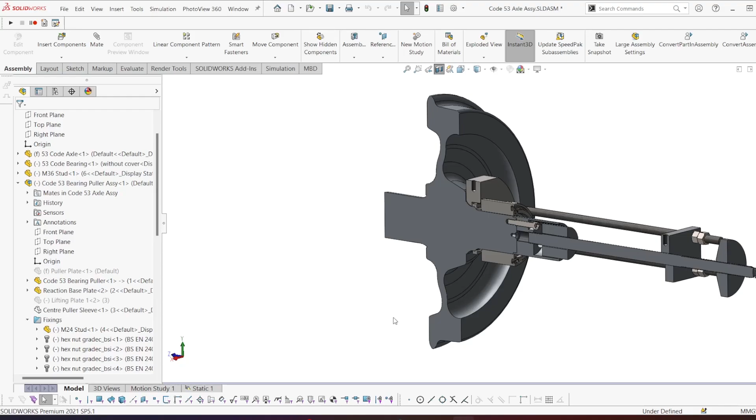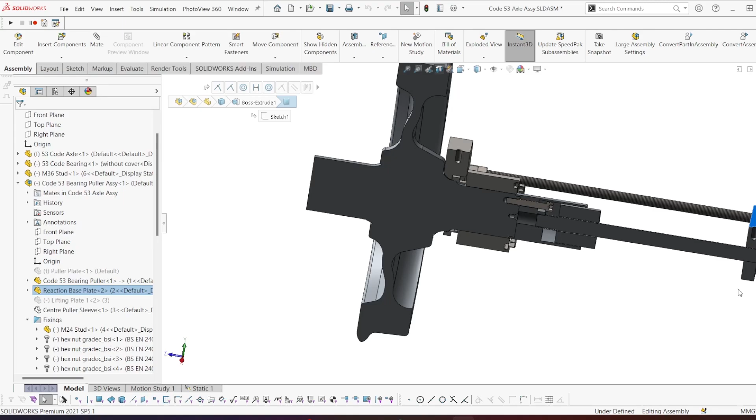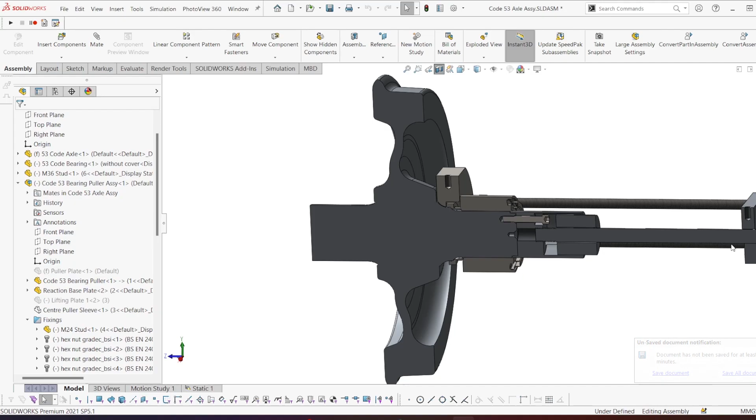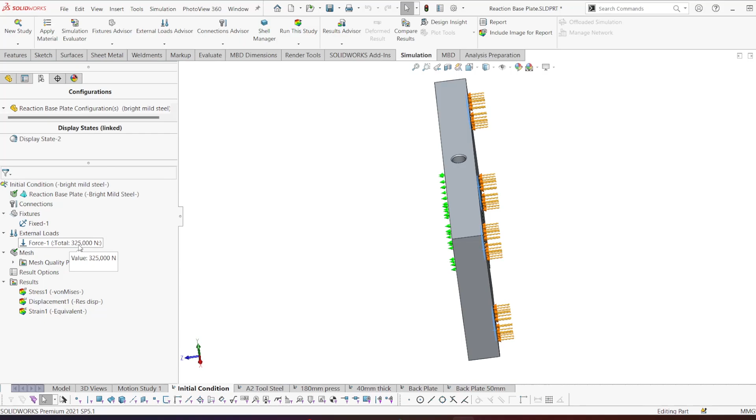Going into the part here, this is the standard part, and in the initial condition, we know it failed by 1.2 mil on either side. How much force would it be required to emulate that? That equates to a total of basically 32 tons, or probably closer to 34 tons here.

And if we look here, you can see that this creates a deformation or a max displacement of 1.2 mil on this corner. That means if this was sitting on the bench here, exaggerated by a factor of 25, this lip here would have extended by 1.2 mil from the table.

So in actuality it could be half that, but we'll work with this as a safety margin, because naturally the forces and the friction could be different, so it could get worse over time.

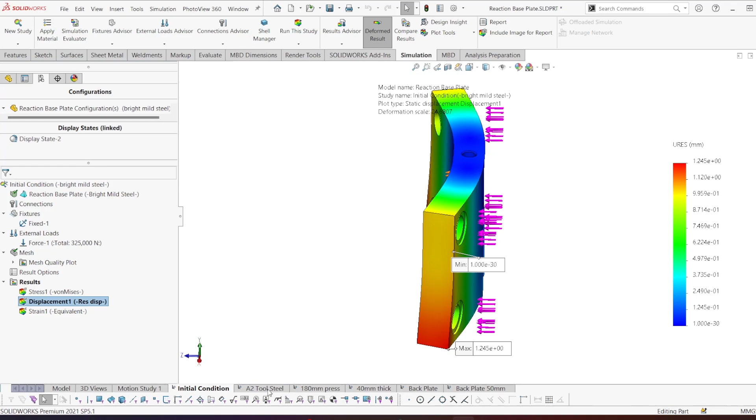So then the logical conclusion is, this is 32 mil thick, what happens if we go for A2 tool steel, which is what this is? One thing to note with the previous configuration, as bright mild steel at 32 mil, this is experiencing about 1.4 gigapascals of stress, mainly localized in this area.

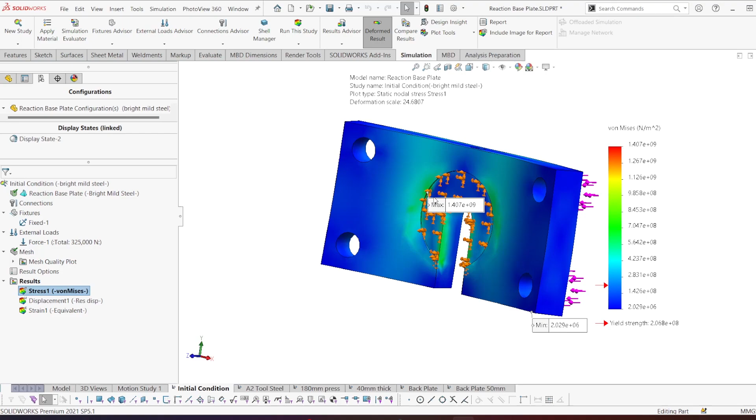That's mainly where the stress is, and naturally where the hydraulic press is hitting, which I've assumed to be 100 mil in this small area. You can see a lot of the highest stress is actually on the lip of that hydraulic ram, and also at the back area here.

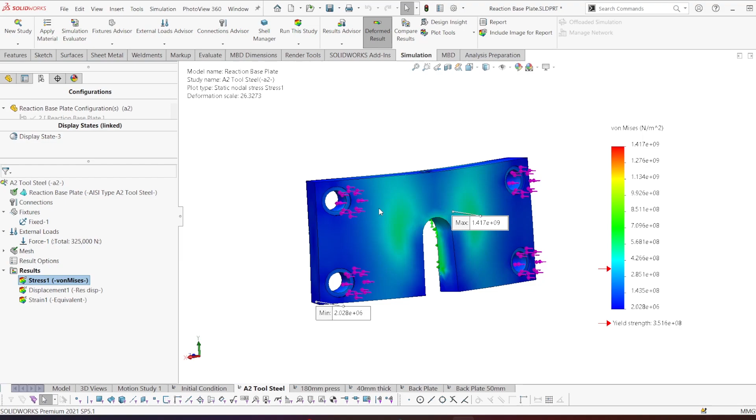Once we apply A2 tool steel, we can see that the stress increases marginally. Why is that? The reason the stress increases is because tool steel is a harder, more rigid material, i.e. it's less ductile than mild steel, which gives it strength but at the same time makes it more brittle, meaning that the harder the material, the more likely it will fracture completely instead of bend, as we've seen with the bright mild steel.

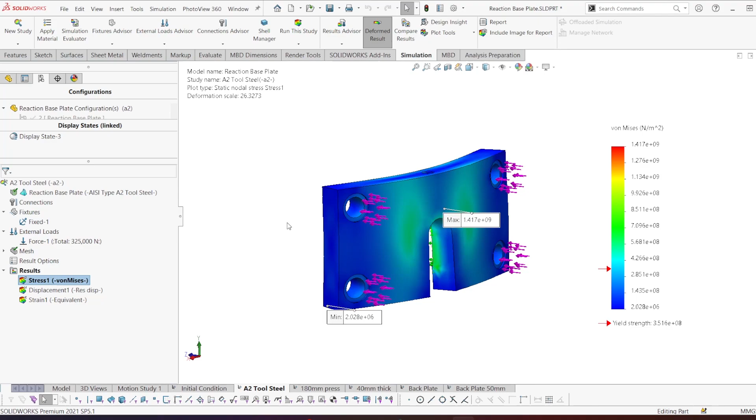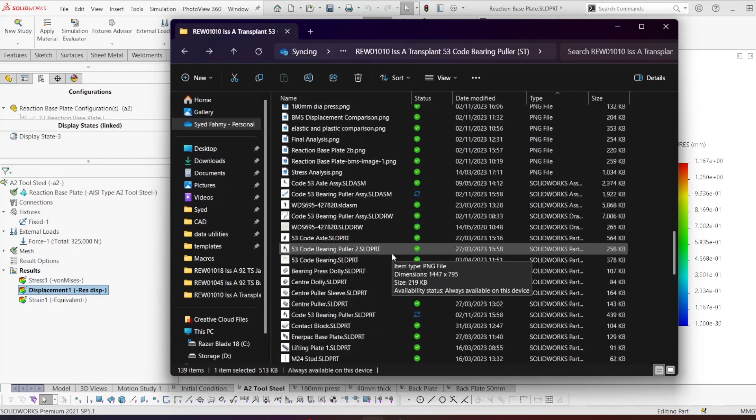The displacement is less, so we can see here that with tool steel, nothing changed other than the material. We're getting about 1.16 displacement, whereas it was 1.2 something before. So it's worth noting that the displacement is improved but not as much as we thought. We've seen that tool steel improves it, but not enough.

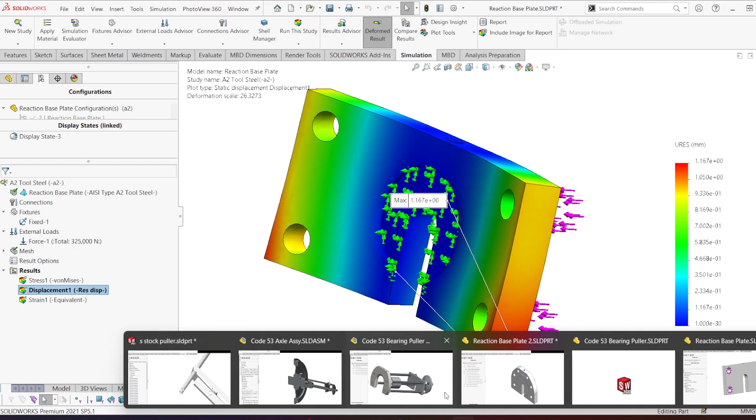Then the key point, what we haven't discovered before, is actually the distribution of the load from the hydraulic press itself. And I thought, what if we use, let's say, this back plate here between the hydraulic press as we're trying to extract the bearing. This has a diameter of 180 mil, but let's say we use a similar material, a spacer of sorts that's 180 mil. What would that do to our result?

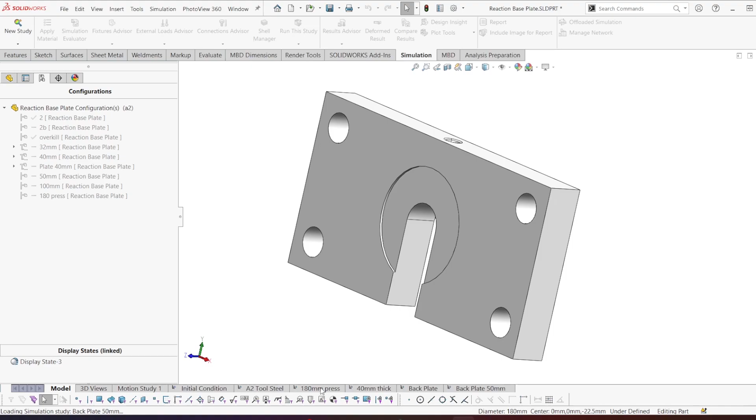So what that means is that the force distribution is greater. Where the hydraulic press was applying a force here and creating more stresses and a bigger moment, what happens if you have a bigger disc that reduces that sort of deflection? Would that help? And the answer is it does, which we'll see now.

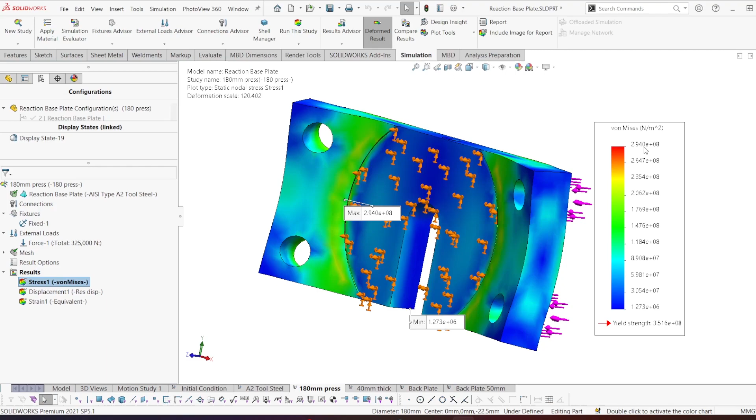So at 180 mil spacer between the hydraulic press and the back plate here, we can see immediately that the stress has already gone down to 294 megapascals, which is less than the yield strength of tool steel, which is about 350. So this is already a good result without changing material. Displacement is now at 0.25 mil, which is negligible, and because the stress does not exceed the yield strength, this would spring back into its original condition.

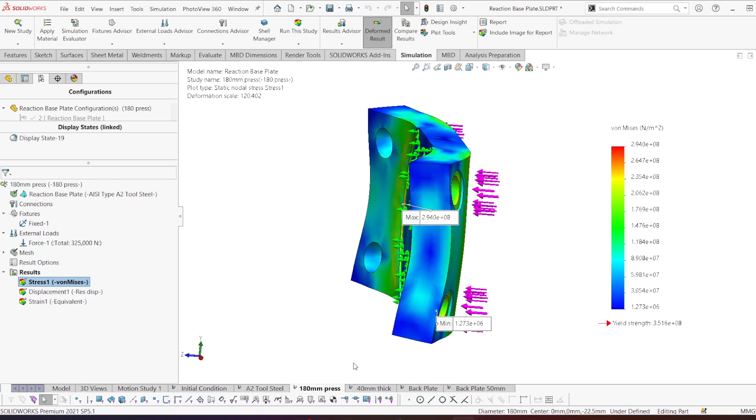Now, to be on the safe side, obviously the next question is what happens if we make it thicker. Hence I've got this little option here. So this is 40 mil thick with the same 180 mil diameter disc to distribute the stress. And what does that look like?

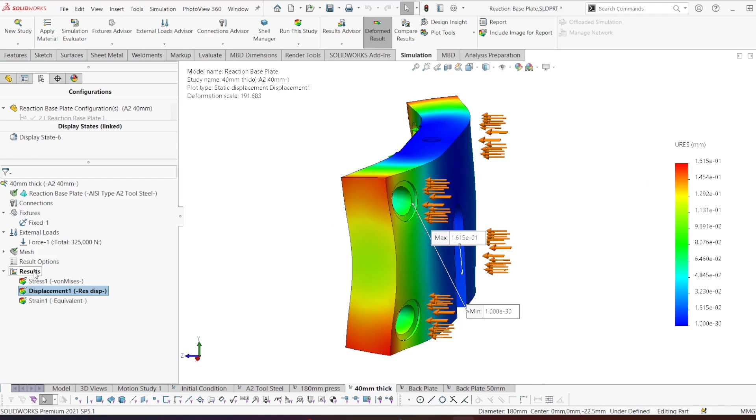So with 40 mil plate, the stress actually goes up marginally, but the displacement goes down again a little bit more. Before it was 0.25, but now it's 0.16. And I suppose I should explain about stresses a little bit more.

This is showing the maximum stresses along an area. Just because you add more material—some of the suggestion is, for example, what happens if we add material to the side here or to the top here, and I've tested those as well, but basically it doesn't help, because as you can see the green line here, this is where the stress is.

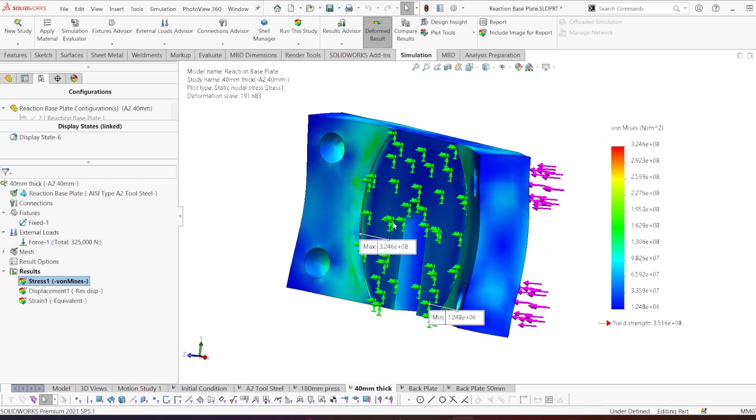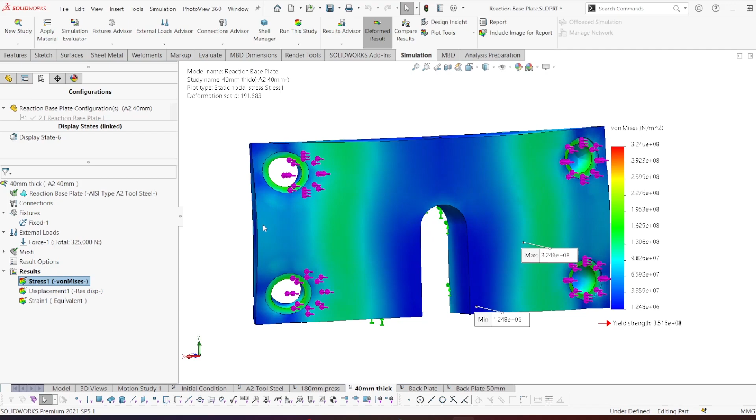When you're holding that bit fixed and you're applying a force in the position of the nuts here, then naturally this bit is experiencing the stress of those forces. Less so at the top here. So adding more material here doesn't reduce the stress it's experiencing here. Adding more material here, because you can see it's cold and blue there, doesn't reduce the stress here.

40 mil plate thickness improves things—between 32 mil and 40 mil, it's a big help. So this is the 180 mil on this side, the stress and displacement. This is 32 mil this side and 40 mil this side, and we can see that at 40 mil you actually increase the maximum stress in that specific point, purely because you've added material and there's, let's say, more to go around.

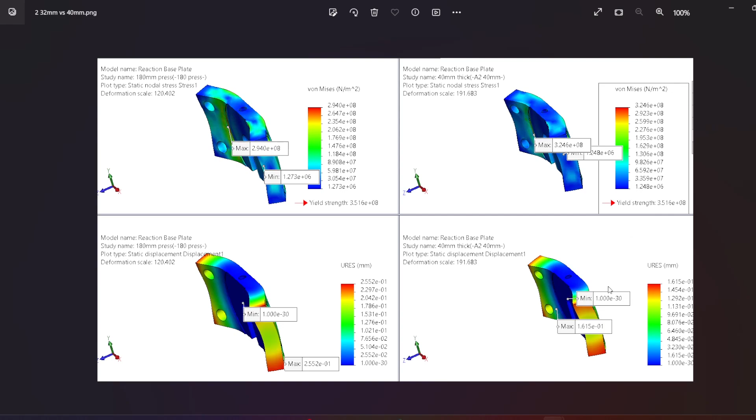I'm not sure how that translates, but ultimately you've reduced the displacement by another 0.08, 0.09 even, between these two. So 40 mil does help, about the same as the addition of converting this to tool steel. So we know that 40 mil helps.

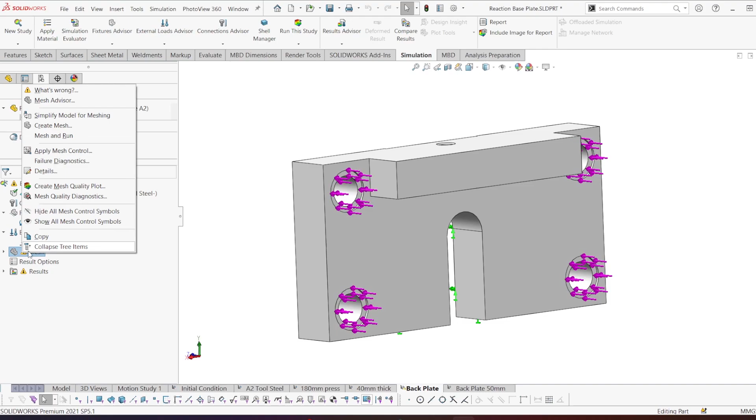What else could we do that would improve this? Naturally, it's the back plate, which we talked about as well. So now that you add a back plate here, the idea is that you distribute that sort of stressed area along this little bar, and let's see what that looks like. So the stress is reduced significantly.

I believe this back plate is, I want to say, 40 mil. Yeah, it's 40 mil thick with a back plate, and the displacement I think was down again a little bit more. This was 0.16 something, now it's 0.15 something. But again, it's good that the stress, or the maximum possible stress experienced, is less than the maximum yield of a tool steel.

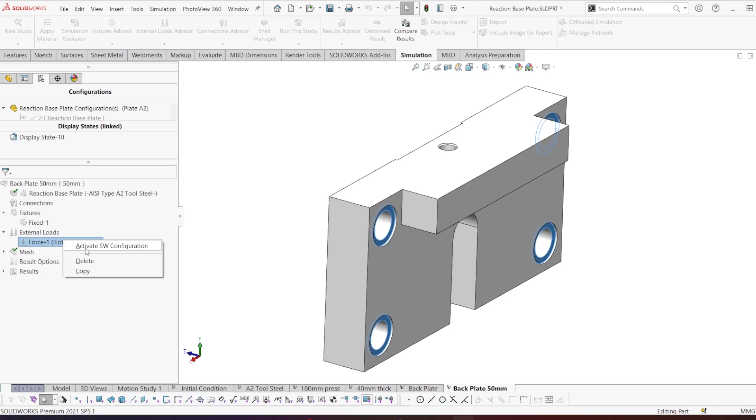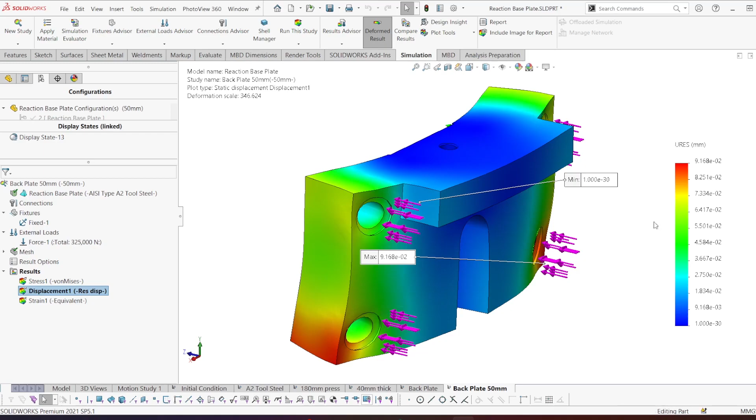And just to go the extra mile, this is the 50 mil variation. If we made it mega thick like so, you can see that the stress is now at the 200 megapascal region, and the deflection now goes to 0.09, so nearly 0.1 mil. So a big improvement still.

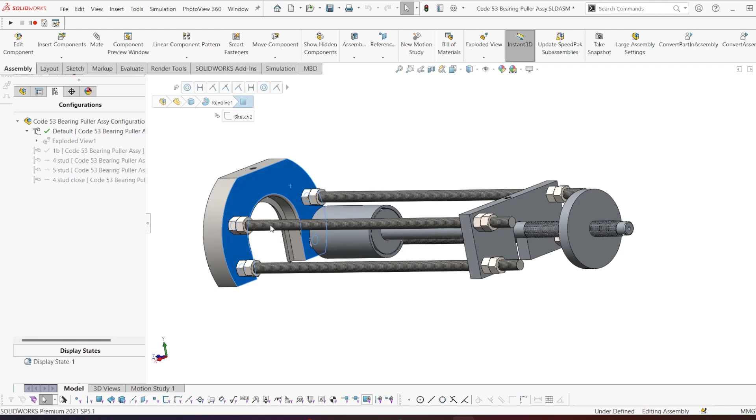And finally, I had to play about with like the maximum ultimate, probably overkill design. So if we notice here, there's some space here that helps the distribution of the stress, because this is acting as a puller, and you're basically applying a bending moment only on the left and right lip of this plate. You're deliberately trying to bend it.

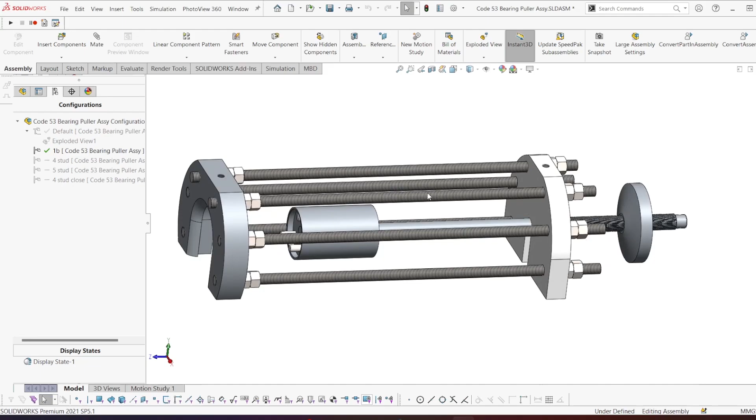As another configuration, what we could do is this assembly where you add 2 more studs into the free space there, and you make this plate more or less mirror that kind of puller of the bearing. And obviously I can add the little back plate here as well, which I did mess about doing. So this is the final form, let's call it.

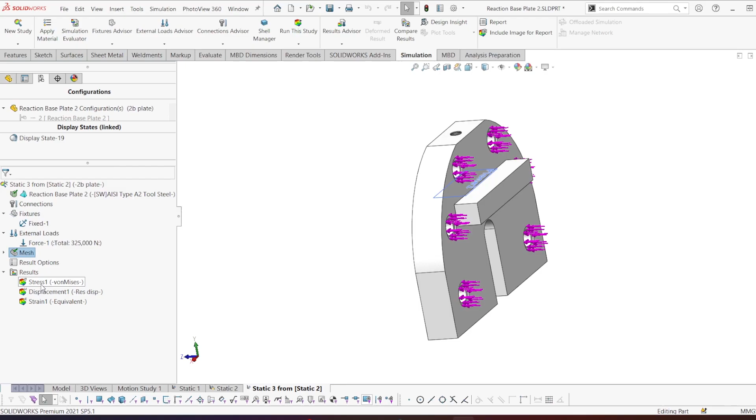And we can see that the stress is now at 1.4, because it's distributing each of those green areas along the back plate, along each of the 6 points where the studs are, or the nuts are hitting, and obviously against a wider area. So that is very good.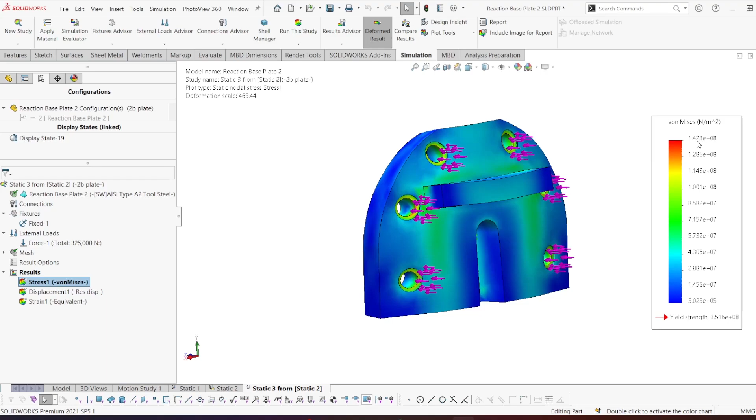I dare say that's one of the best results we could possibly achieve. And this isn't even 50 mil—this is, I think, 45 mil. So it's not too heavy, too cumbersome. And the displacement of this one is 0.07 mil, which is better still than what was the 50 mil plate without this extra bit.

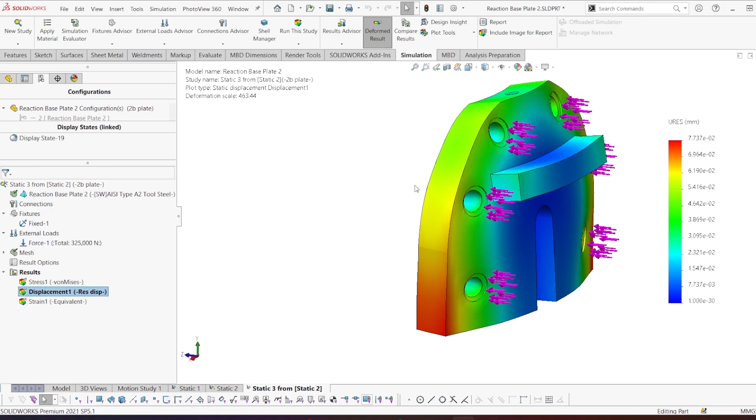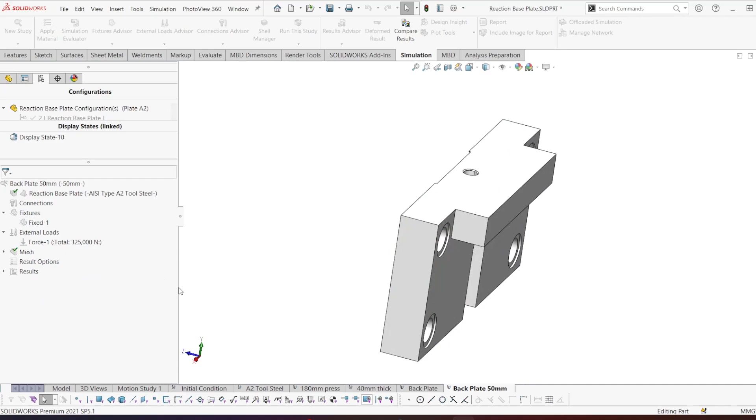I would say 40 mil with a back plate is potentially the best result, and that is still within the yield and very, very little displacement, 0.15. But naturally we have more options to improve this further. Go to 50 mil if we'd like, with the back plate, like 60-70% within the yield, and 0.1 mil displacement, so an even bigger improvement.

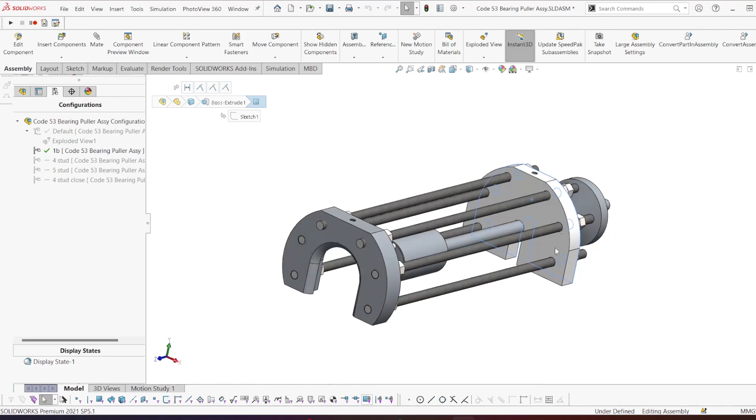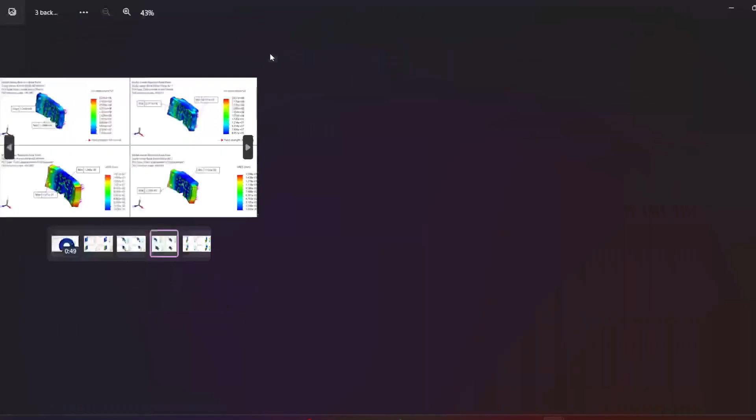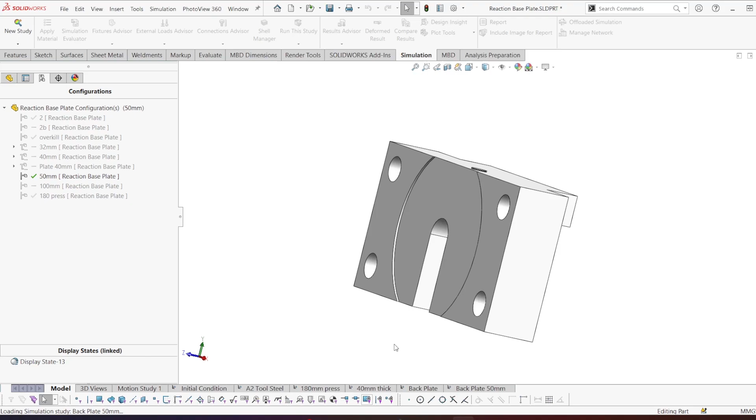So them's the options, and hopefully that will more than likely remove the issue that they're facing, at least according to the initial conditions applied. These are just some snapshots of comparisons that I've done. But yeah, if we have the appetite, this is the ultimate design with a little back plate there. If you want to keep it simple, a 40 mil thick plus a back plate and a spacer here would complete the job.